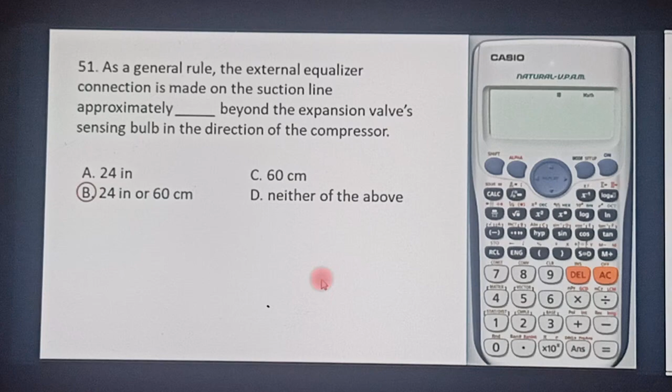Next. 52. What should be the cooling requirement due to emission of human body to maintain a comfortable temperature in a dance hall with an attendance of 1,500 people, of which 75% of the people will be dancing, others will be seated? Take note that the adult will give off 71.8 watts of sensible heat while engaging in moderate dancing, and 57.1 watts of sensible heat while sitting. The latent heat emissions for similar situations are 177.3 watts for dancers and 45.5 watts for sitters.

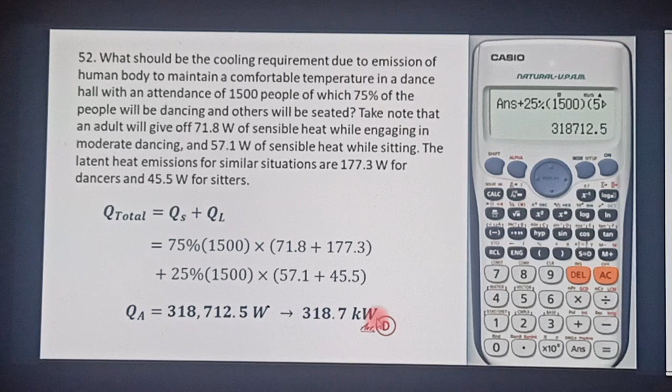53. Which sensing valve charge is used in low and medium temperature applications that do not require pressure limiting characteristics? Letter A, liquid cross charge. 54. In 1 hour, 300 kilojoules of heat flow by conduction from the outside to the inside of a cold storage. If the temperature and all other conditions are the same, how much is the heat flowing through the cold storage room in 2 hours?

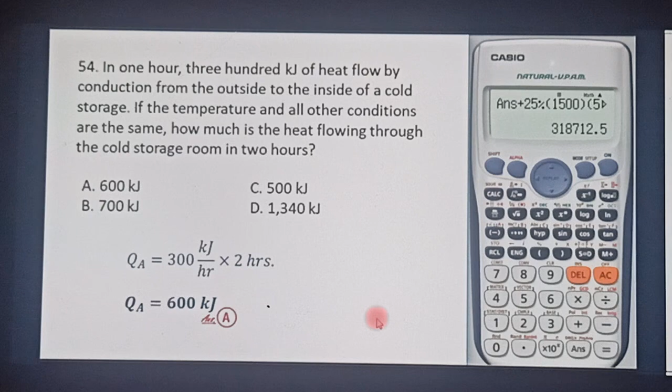55. Which of the following changes may increase the flashing in a liquid line? Letter D, decreasing the line diameter. 56. The heat pump has a performance factor of 8.0 PF. If the heat pump is used as a refrigerator, what is the required horsepower per ton of refrigeration?

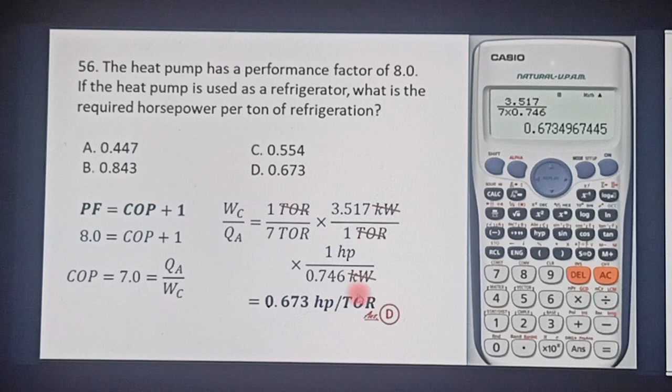C. 58. The suction pressure of a 4-stage compressor is 140 kilopascal. It compresses air at the rate of 15 cubic meters per minute. Clearance is about 8% and 200 RPM. The compressor discharges compressed air at a pressure of 1000 kilopascal. Determine the ideal pressure at the first stage intercooler considering that the compressor uses intercooling.

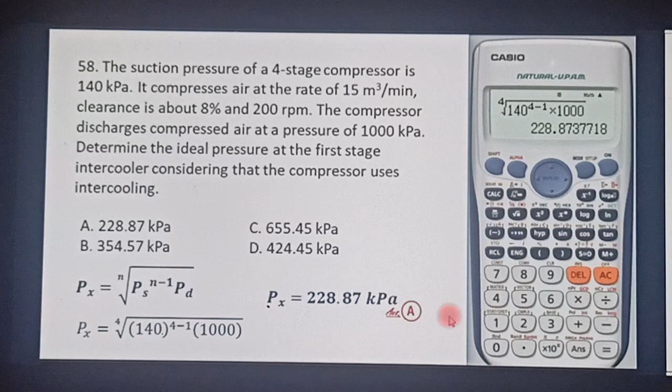59. Refrigerant piping is designed and installed in a manner that A. Minimizes refrigerant pressure losses in the connecting piping. 60. A receiver tank is used to blank. A. Hold the excess refrigerant during lighter loads.

Kilogram of air is compressed adiabatically in a steady flow manner. Compute the heat if the compression efficiency is 80% and the work done on the air is 265 kilojoules per kilogram. So, this one is zero right away.

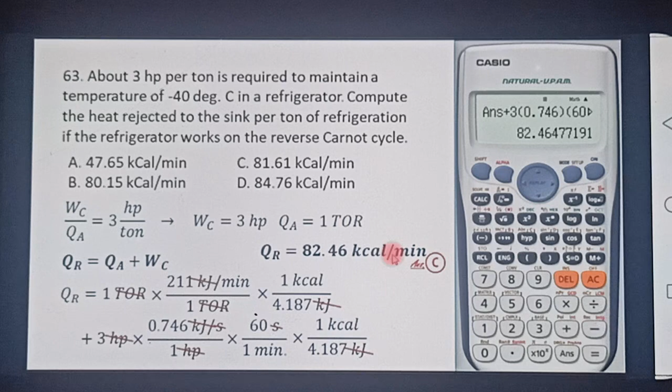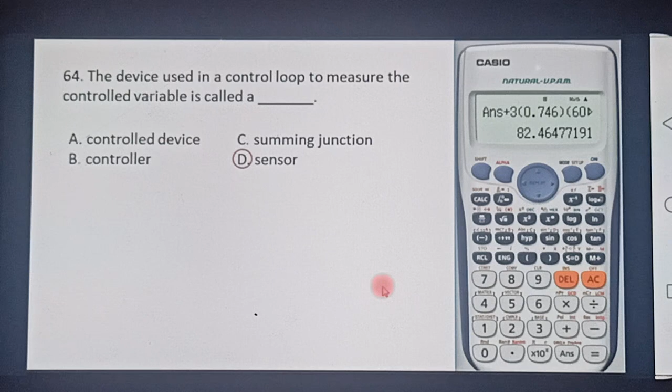64. The device used in a control loop to measure the controlled variable is called a sensor. 65. An air compressor consumes 1,200 kilowatt-hour per day of energy. If the electric motor driving the compressor has an efficiency of 80%, find the mechanical efficiency of the compressor knowing that the indicated power of the compressor is 34 kilowatts.

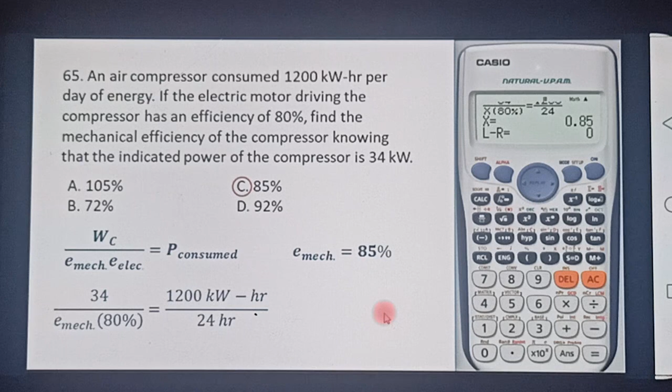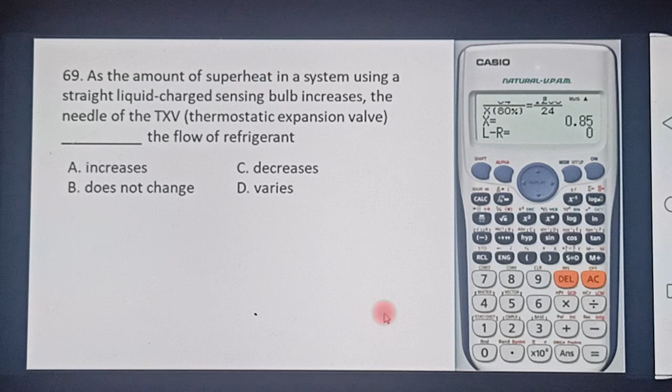Number 66. If the thermal capacitance of a process is low, the control differential must be blank to prevent short cycling of the compressor. Answer is A, increased. 67. As the amount of saturated air drawn back into a tower decreases, the tower approach blank. C, decreases. 68. Which of the following is not considered when determining the pressure drop available for a TXV, a thermostatic expansion valve? C, refrigerant pressure. As the amount of superheat in a system using a straight liquid-charged sensing bulb increases, the needle of the TXV blank the flow of refrigerant. A, increases.

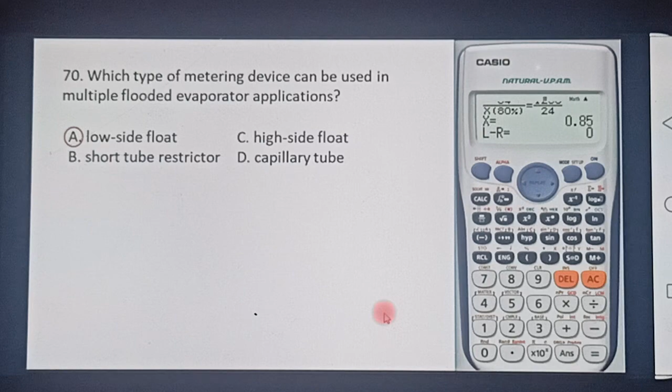Which type of metering device can be used in multiple flooded evaporator applications? A, low side float. Be used to create a check valve in a heat pump system. Letter B, short tube restrictor.

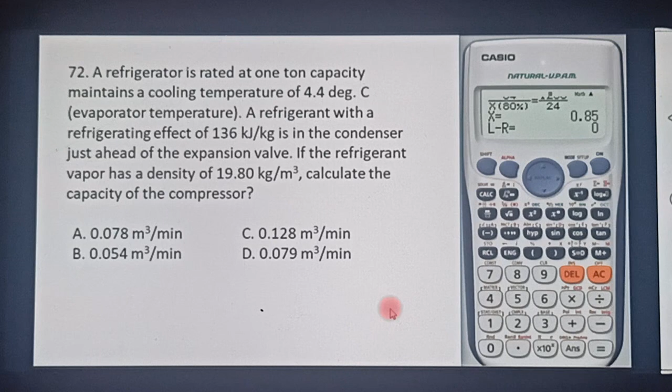72, problem solving. A refrigerator is rated at 1 ton capacity, maintains a cooling temperature of 4.4 degrees C evaporator temperature. A refrigerant with a refrigerating effect of 136 kJ per kilogram is in the condenser just ahead of the expansion valve. If the refrigerant vapor has a density of 19.80 kg per cubic meter, calculate the capacity of the compressor. So in this case, hinahanap po ay work ng compressor.

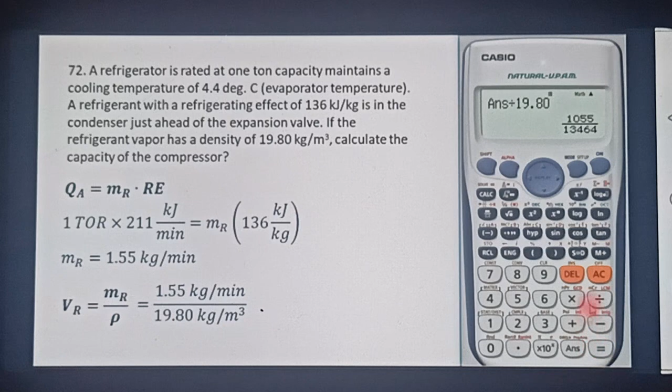Now let us compute for the volume flow rate, how much passes through per cubic meter. We just divide by density. Our problem mentioned the refrigerant vapor density, so divide by density: 1.55 over 19.80, so we divide by 19.80. So that's it, we have 0.078 cubic meters per minute, and that is letter A.

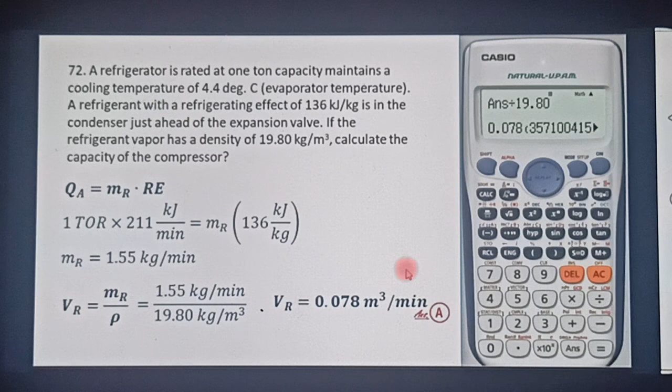When it comes to compressor capacity, the problem may be asking for the horsepower or kilowatts of the compressor, or otherwise its volume capacity, how much refrigerant it takes in and releases. In this case, what's being asked is the volume flow rate of refrigerant passing through the compressor: 0.078 cubic meters per minute, and that is letter A.

73. Which type of metering device can be used in packaged air conditioning units? Answer B: Short tube restrictor and capillary tube.

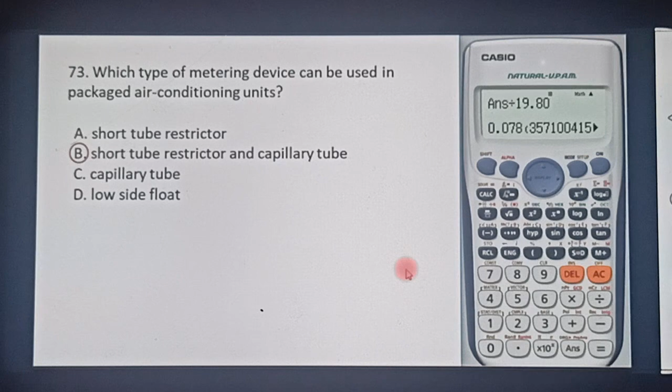74. Which of the following system characteristics does not affect the flow rate through a stationary short tube restrictor? D. Fluid direction.

75. Which of the following system changes has the least effect on the flow rate through a stationary short tube restrictor? B. Increase in subcooling.

76. Which type of intercooler mixes the liquid refrigerant from the condenser with the discharge vapor of the lower stage compressor? A. Open.

77. Which of the following systems has the most complicated oil return system? A. Direct staged.

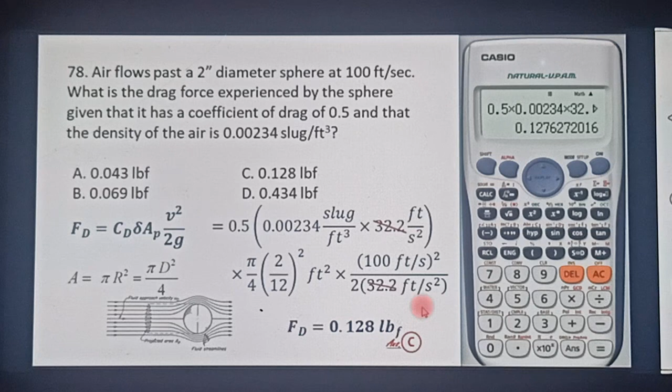79. Discharge line lubricant separators are not usually employed in systems that are: operating at low temperatures, utilizing non-oil returning evaporators, and systems with a small range of capacity control. The answer is D, they are not used in all of the above systems.

80. Which of the following high side pressure regulators operates on an increase in differential pressure? That is C, or ORD, open on rise of differential.

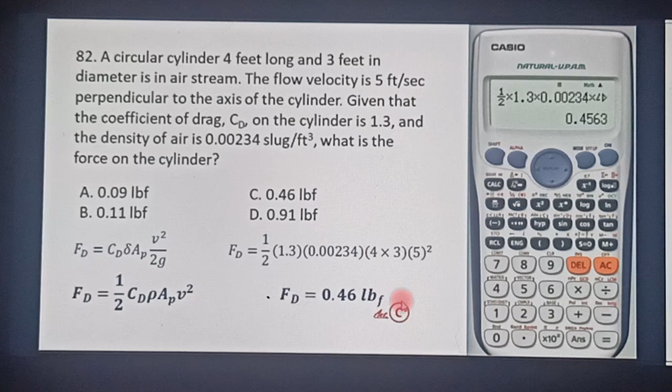83. Which type of control requires a control differential? C, 2 position. 84. When the pressure on the high pressure side of the system decreases below the high limit set point, the control differential... An auto-resetting high-pressure control closes the control circuit to the condensing unit, enabling the compressor.

86. A hot gas bypass valve responds to changes in the system's suction pressure. The answer is C, suction.

87. As the difference between the cut-in and cut-out pressure increases, the answer is letter B, the range increases and short cycling decreases. 88. As the load of a refrigeration system increases, the on cycle of the compressor increases.

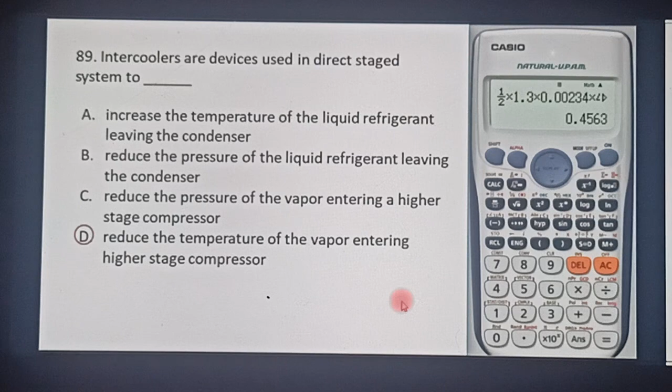89. Intercoolers are devices used in direct staged systems to: letter D, reduce the temperature of the vapor entering the higher stage compressor.

90. The type of unit that incorporates several stages of compression using different refrigerants is called a cascade system, that is letter C. 91. Refrigerant 23, R23, is not used in the high stage of the cascade system.

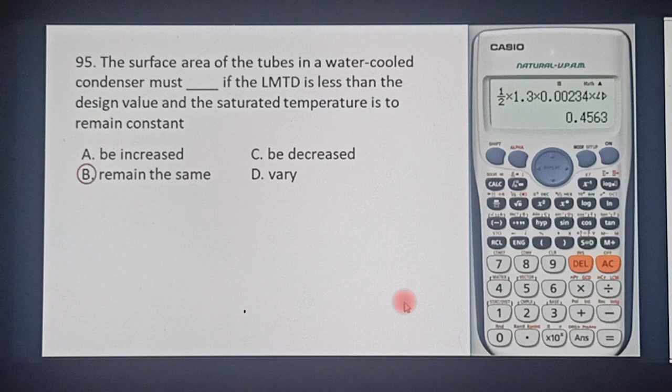96. A measure of the average thermal intensity of the gas and vapor molecules in the atmosphere is the dry bulb temperature.

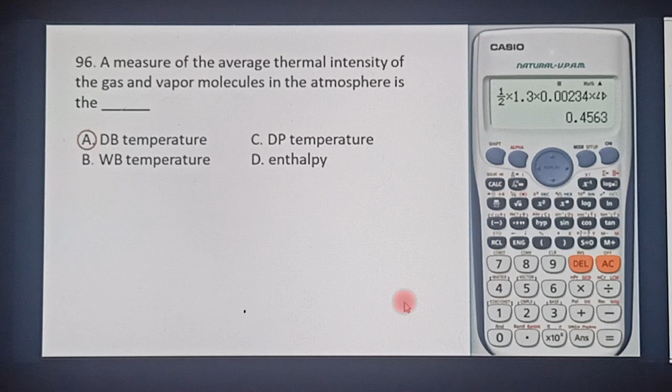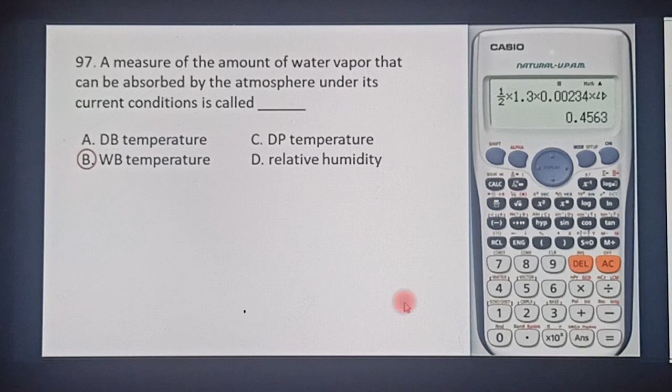97. A measure of the amount of water vapor that can be absorbed by the atmosphere under its current conditions is called wet bulb temperature. And that's the reason why it's called wet bulb, because it's the capacity of the air to absorb water vapor. That's the wet bulb temperature. The dry bulb, meanwhile, is the temperature you can measure using a thermometer.

98. The answer is D. Let's check the solution. A 26 horsepower pump is to deliver 475 gallons per minute of gasoline at 20 degrees C. Calculate the resulting pressure rise across the pump if it is 78% efficient. Note, the density of gasoline is 42.5 pounds per cubic feet.

What we want to compute, according to the problem, is the pressure rise. Remember, in calculating the work of a pump, the basic formula is gamma Q H. If we rearrange gamma Q H to Q times gamma H, that gamma H is actually the pressure. So the work of the pump is equal to the product of the volume flow rate Q and the pressure rise P. So if we want to compute the pressure rise, we just need to divide the work of the pump by the volume flow rate.

Fortunately, in this problem, we already have the work of the pump, given as 26 horsepower, and the volume flow rate, 475 gallons per minute. We just have to be careful with the unit conversions, unit analysis, since these are in different units, and we have to make sure the resulting pressure is in PSI.

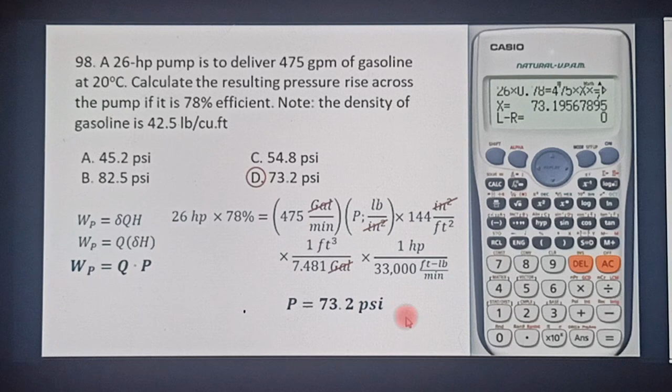Number 99: the ratio of the current partial pressure of the water vapor in the atmosphere to the saturation pressure of the water vapor at the current dry bulb temperature is called the relative humidity.

And finally, our last item for refresher 5 for PIPE: the saturation temperature of the water vapor in the atmosphere is called the dew point temperature. Okay, and that's the end of our refresher 5 for PIPE.